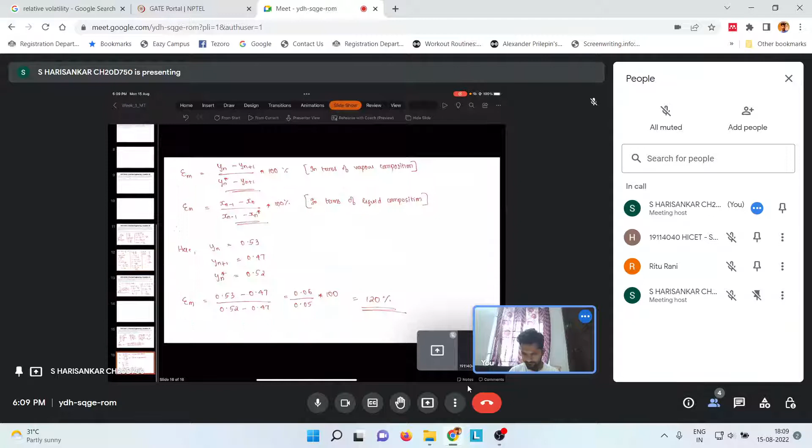Fine. So how do you guys want me to proceed? You want me to give a brief introduction to distillation, like the McCabe-Thiele method and so on, or shall we go straight into the questions since you've learned these concepts in class? Sir, give some introductions. Okay, fine, sounds good. Thank you, sir. Okay, I hope my screen is visible to you guys. Yes, sir. Okay. Fine.

So today we'll be learning about distillation. Distillation by definition is nothing but a separation process, and this separation occurs based on various different properties. Can you name a few properties by which distillation occurs? Just take a guess. Okay. So distillation mainly occurs based on the difference in the boiling points of components in a mixture. Okay, more people have joined. Yeah, so distillation occurs based on the difference in the boiling points of the different components in a mixture.

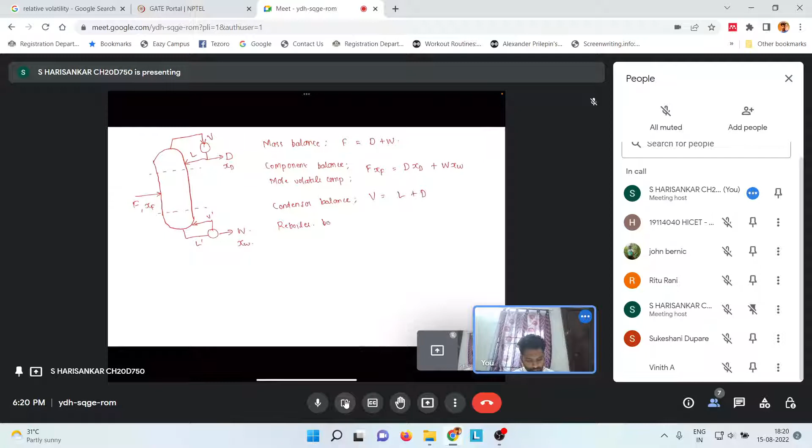So let's say L dash and this is V dash. So the reboiler balance will be L dash is equal to V dash plus W. So these are just simple mass balance equations throughout the distillation column, right? So let's look into a few basic assumptions of the McCabe-Thiele method.

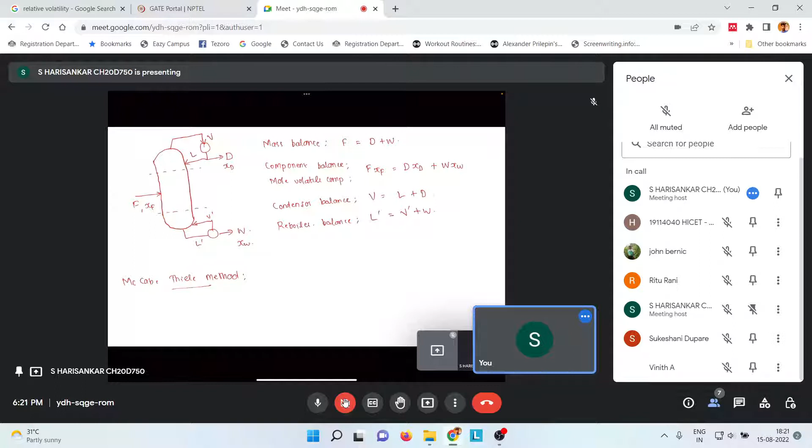So can anyone say what are some of the assumptions associated with the McCabe-Thiele method? Anyone? Okay. So some of the assumptions: there is no heat loss or heat gain occurring in the distillation column. That is, it is basically an adiabatic operation.

Then another assumption is that there is no heat of mixing. And then the most important assumption is constant molar heat of vaporization. What the third assumption essentially means is that, let's say, n moles of liquid is being vaporized. That means n moles of vapor will also be condensed. So these are three of the main assumptions in the McCabe-Thiele method.

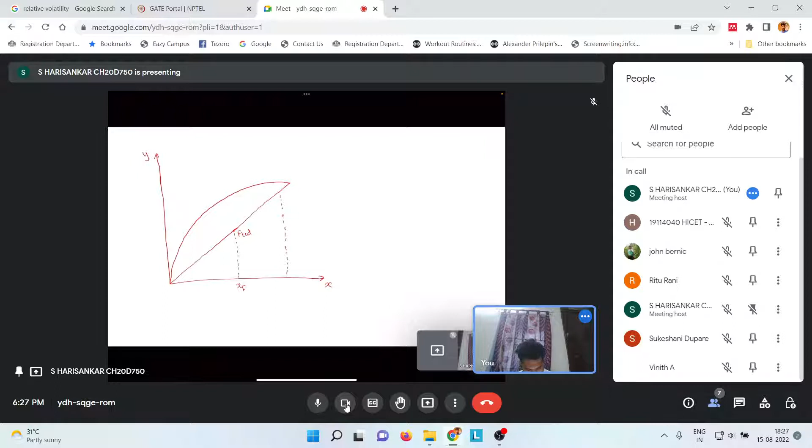Okay, now let's say xf is our feed, and this point xd represents our distillate, and this point xw represents the mole fraction of the more volatile component in the residue. So how you usually do it graphically is that we use this equation, y is equal to R by R plus 1 x plus xd by R plus 1, which is the equation for the rectifying section, and this line is represented by this.

So this line is of the form y is equal to mx plus c basically, where m is the slope and c is the constant, which is the intercept. So this intercept is basically xd by R plus 1, and this slope is basically R by R plus 1.

Now in a similar way, you will also be able to find the operating line for the stripping section using the formula y is equal to L bar by V bar x minus, what was the formula? Yeah, W by V bar into XW. So you can use this to find the stripping section. The operating line will go something like this. And what you usually do is you connect the operating lines of the enriching section and the stripping section with the equilibrium line like this.

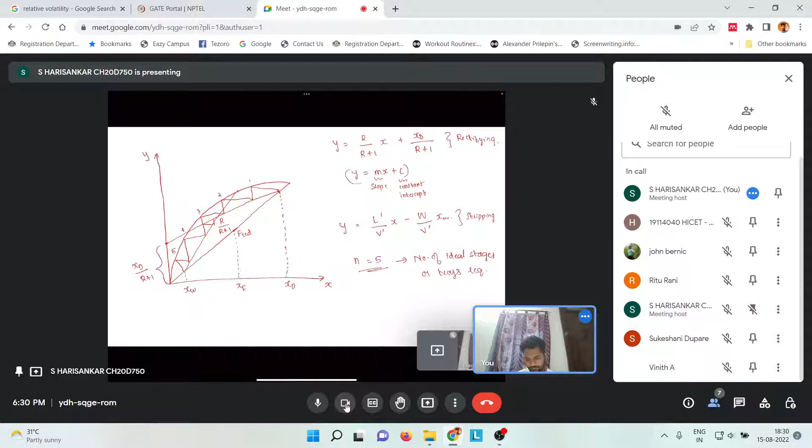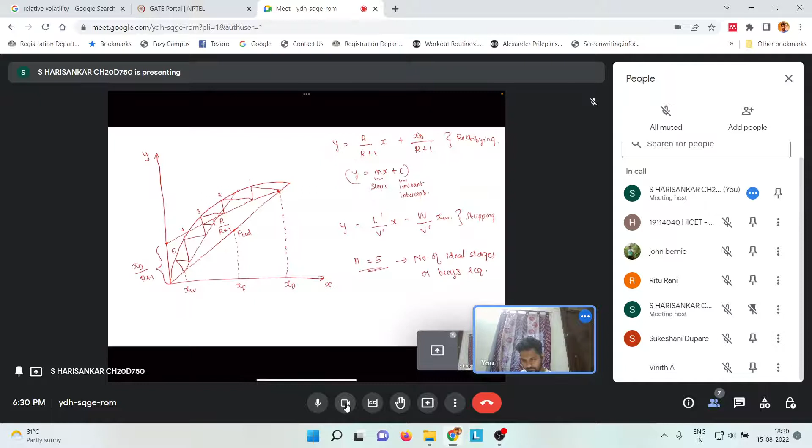So yeah, these are just some of the basic concepts of the McCabe-Thiele method. Now let's, okay. All right.

So there is one more term you need to be familiarized with while proceeding to the numerical problems, which is the feed line or the Q line. Right. So there is one term which is called Q, which is nothing but the fraction of liquid in the feed. So the feed that you put inside the distillation column can be of 5 different types. It could be subcooled liquid, it could be saturated liquid, then it could be a mixture of both liquid and vapor, so liquid vapor mixture.

Then it could be saturated vapor, and it can also be superheated vapor. Fine. So this Q basically tells us how much of your feed is liquid. So when your feed is subcooled liquid, Q will be greater than 1. When your feed is saturated liquid, Q will be 1. When your feed is a liquid vapor mixture, it will be between 0 and 1. When your feed is saturated vapor, Q will be 0. And for superheated vapor, it will be less than 0.

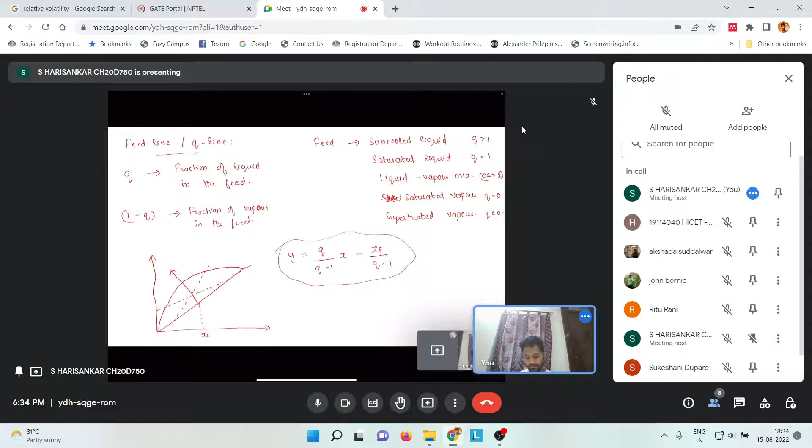Yeah, so these are some of the basics and mainly the basic general equations that you need to remember while solving problems from distillation. So let's get to today's questions for distillation.

Okay, so let's go with the 2018 question.

So before we proceed, are the basic concepts of distillation clear to everyone? Do you have any particular things that you want me to explain, or any doubts from the things that we just looked into? Feel free to interrupt me at any time. I'm more than happy to help. Is this fine, or shall we proceed? Can anyone respond? Okay, I assume things are fine. Fine. So let's get into this question.

So this is a question from 2018 GATE Chemical Engineering. A binary distillation column is designed by the McCabe-Thiele method to get a distillate mole fraction of 0.9. The enriching section operating line has an intercept with the y-axis at 0.3 mole fraction. The ratio of liquid to vapor molar flow in the enriching section is, rounded off to 3 decimal places, blank.

You can refer to the NPTEL lecture series for this concept, lecture 3, week 9, number of trays by McCabe and Thiele for distillation, Mass Transfer Operations 1 by Professor B. Mandal, Department of Chemical Engineering, IIT Guwahati. These videos are available for free on the NPTEL website, and it's suggested that you make use of this opportunity to get the concepts more clear.

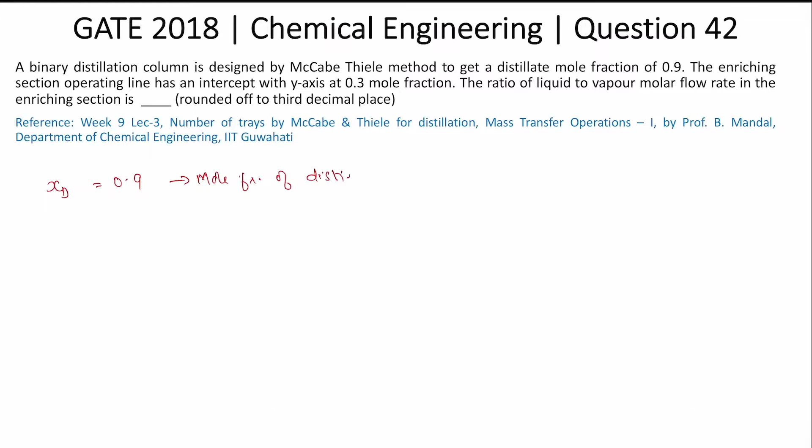So let's just write the data that they have given to us. They have given XD, the mole fraction of the more volatile component in the distillate, as 0.9. They have also given us that the intercept of the enriching operating line with the y-axis is 0.3. We just saw how this enriching operating line intercepts the y-axis and how that is related to the general equation of the enriching section. So that is 0.3.

For an enriching section, the general equation is y = R/(R+1) x + xD/(R+1). So the intercept 0.3 is the intercept from the general equation, so 0.3 = xD/(R+1). And the slope is R/(R+1). The other form of this equation shows that the slope is also equal to L/V. So what we have to find here is L/V, which equals R/(R+1), where R is the reflux ratio.

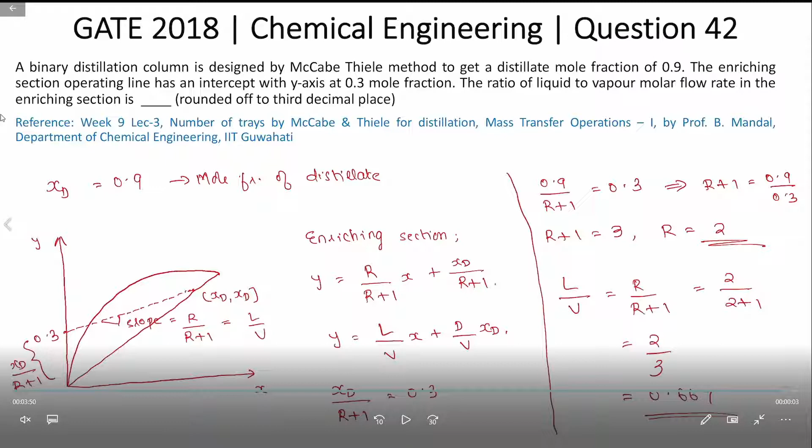So this is a straightforward question that we can solve using the concepts that we learned while doing McCabe-Thiele graphically.

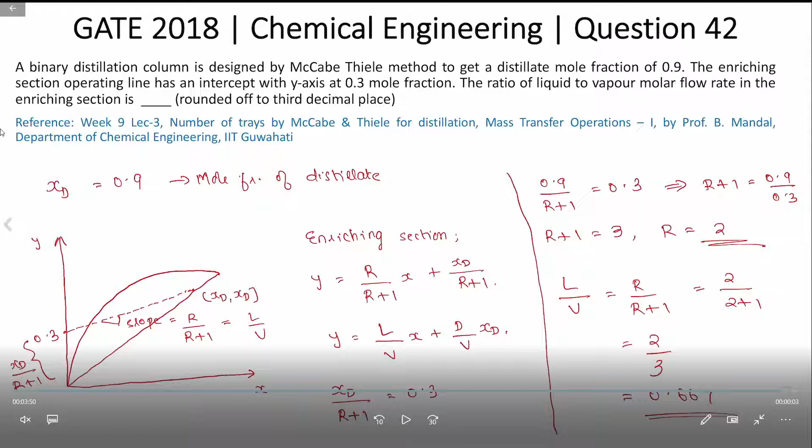Is this clear? Okay, let's move on to other problems. Fine.

So this is a question from 2017 GATE. The composition of vapor entering a tray in a distillation column is 0.47. The average composition of the vapor leaving the tray is 0.52. All the compositions are expressed in mole fractions of the more volatile component. The Murphree efficiency based on the vapor phase, rounded off to the nearest integer, is blank percent.

You can also find the NPTEL lecture series for this on the NPTEL website by Professor B. Mandal from IIT Guwahati. There are a few efficiencies which we can measure, basically the efficiency of the tray or the efficiency of mass transfer that occurs in a distillation column. And one such efficiency is the Murphree efficiency.

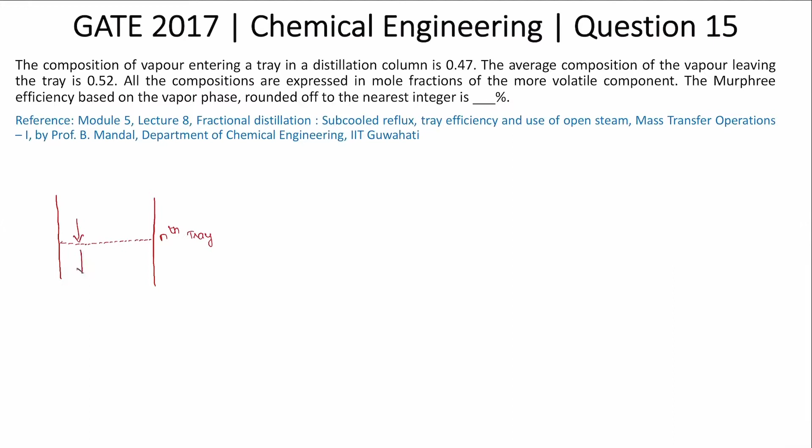So by definition, let's take a tray and let's say it's the nth tray. So there will be liquid and vapor coming in and going out. So let's say Ln-1 is the liquid that is coming from the n-1 tray, and Ln is the liquid that is going out from the nth tray. And you will have vapor also as Vn+1 coming in and Vn going out of the nth tray.

Their corresponding compositions can be represented as Yn for Vn, Yn+1 for Vn+1, Xn and Xn-1 for the liquid. Now this is for a real case. When you do it for an ideal case or the ideal stage, this Yn and this Xn of Vn and Ln will be in equilibrium. So we can represent that as Yn* and Xn*. So in ideal stages, the products leaving the nth tray are in equilibrium. So Xn can be represented as Xn* and Yn can be represented as Yn* in the ideal case.

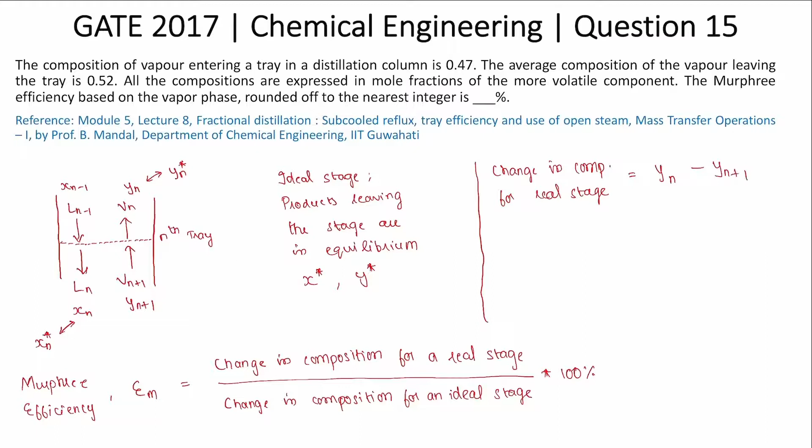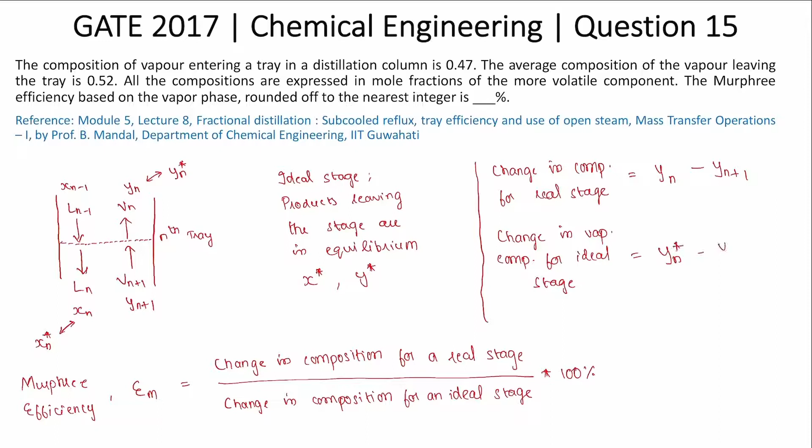So for a real stage, here we want it in terms of vapor composition. So change in vapor composition for a real stage is equal to Yn - Yn+1. And similarly, the change in vapor composition for an ideal stage is equal to Yn* - Yn+1. So the Murphree efficiency in terms of vapor phase composition is the change in composition for the real case by the change in composition for an ideal stage, which is basically (Yn - Yn+1) / (Yn* - Yn+1) into 100%. So this is the Murphree efficiency's general equation in terms of vapor phase composition.

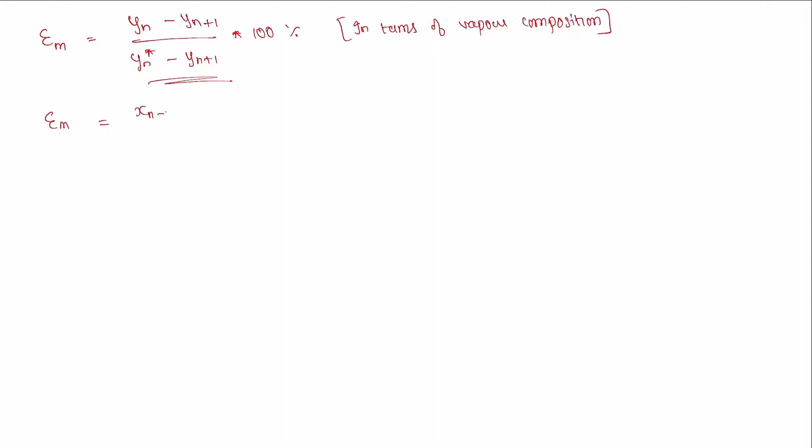Now we can also write this similarly in liquid phase composition as (Xn-1 - Xn) / (Xn-1 - Xn*) into 100%, and this is in terms of the liquid phase composition. So here also the concept is the same. The Murphree efficiency is equal to the change in liquid composition for a real stage by the change in liquid composition for the ideal stage.

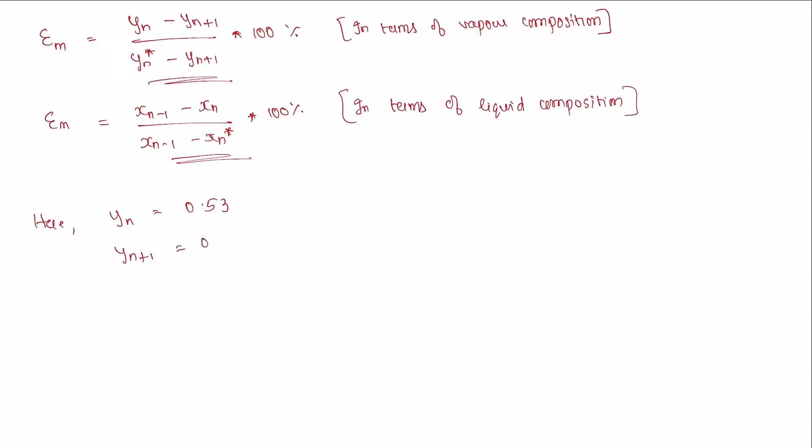So now we have been given a few data here. Yn is given as 0.53, Yn+1 is given as 0.47, and Yn* is given as 0.52. So we just have to substitute these values in the vapor phase equation, and we can find the Murphree efficiency by direct substitution. So Murphree efficiency Em is equal to (0.53 - 0.47) / (0.52 - 0.47), and this will come to 120%. Is this clear?

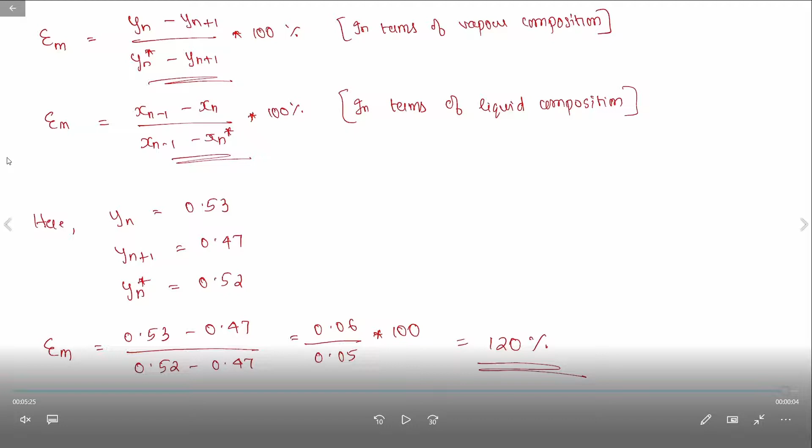Okay. Fine, let's move on.

Okay. So this is again a distillation question which was asked in GATE 2015. A binary feed consisting of 25 mole percent liquid and 75 mole percent vapor is separated in a staged distillation column. The mole fraction of the more volatile component in the distillate product is 0.95. The molar flow rate of the distillate is 50% of the feed flow rate, and the McCabe-Thiele method can be used to analyze the column. The Q line intersects the operating line of the enriching section at (0.35, 0.5) on the XY diagram. The slope of the stripping section operating line up to 1 decimal place is blank. So we have to find the slope of the stripping section, which is basically L bar by V bar. So let's see how to proceed with this question.

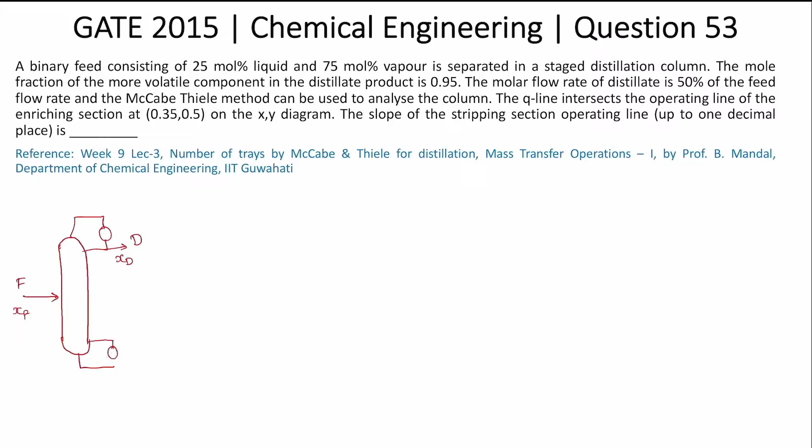So let's draw our distillation column. We have the feed F with the composition XF, the distillate D with its composition XD, and the residue W with its composition XW. It is given that the feed is 25% liquid, which means Q is equal to 0.25, and the mole fraction of the distillate is given as 0.95, and the molar flow rate of the feed is twice that of the distillate. So F is equal to 2D. They have also given us that the operating line of the enriching section intersects the Q line at 0.35 and 0.5. That means at the feed tray, X is equal to 0.35 and Y is equal to 0.5.

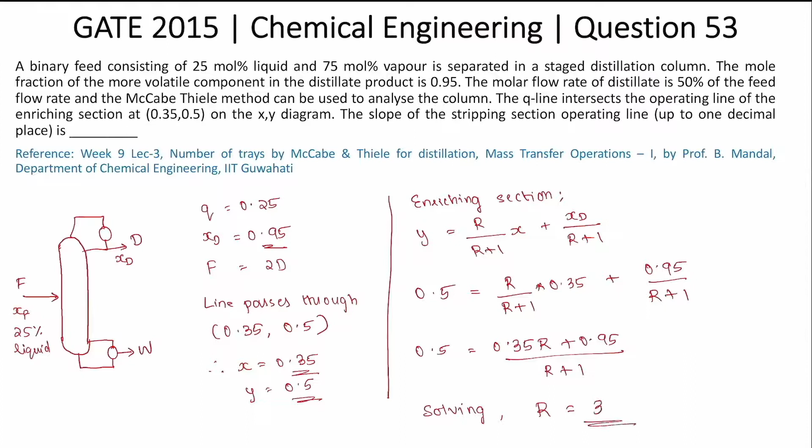So let's write the general equation for the enriching section: Y = R/(R+1) X + XD/(R+1). We have the value for XD, and the values for X and Y from the intersection. We just have to substitute to find R. So 0.5 = R/(R+1) × 0.35 + 0.95/(R+1). This is just direct substitution and solving this equation, and we find that R is equal to 3. So R, which is the reflux ratio, is equal to L/D, and we have L/D equal to 3.

So just rearranging it, we can write it as L is equal to 3D. Now let's take a condenser balance. So we have the distillate D, the liquid that is going back inside as L, and V is the vapor, and the condenser balance is V is equal to L plus D. Here we already have L is equal to 3D. So we just have to substitute: V is equal to L plus D. Substitute for L as 3D, and we get V is equal to 3D plus D, which is 4D.

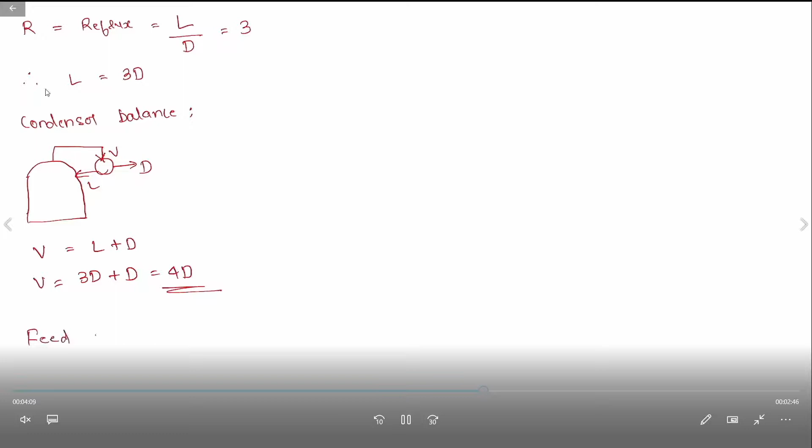Yeah. So feed is 25% liquid. That means 75% vapor. So we have Q is equal to 0.25.

So let's take a feed tray balance. We have the feed incoming, which is F, the liquid incoming and outgoing as L and L bar, and V and V bar as the vapor that is coming in and going out. So from these equations, we can write an equation using L bar, L and Q as L bar is equal to L plus QF, and V bar is equal to V minus (1 minus Q) into F. So this equation is this L bar equation.

Just a second, sorry for the interruption. I lost my... Okay. Okay. Sorry for that. Okay.

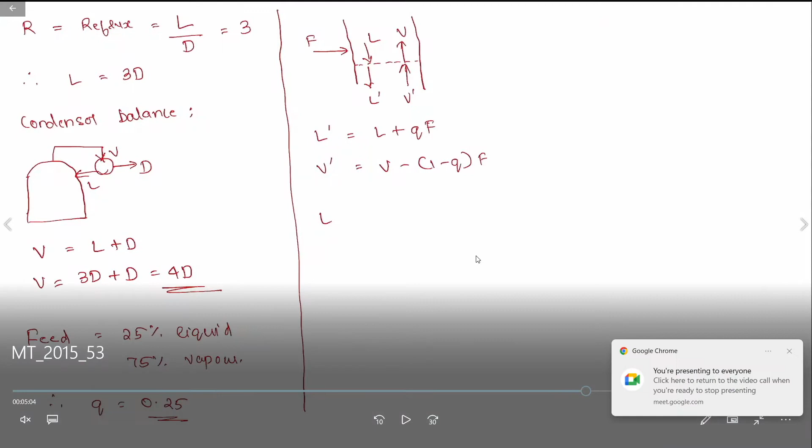So L bar is equal to L plus QF. What this means is L bar, which is the liquid that is going out of the feed tray, is equal to L, which is the liquid that is coming into the feed tray, plus Q into F, which is the fraction of liquid that is available in the feed tray. And similarly, we can write a balance for V bar as well. So V bar, which is the vapor that is entering the feed tray, is equal to V, which is the vapor that is exiting the feed tray, minus 1 minus the fraction of vapor that is available in the feed.

Okay. Fine. So just substitute the values. We have L is equal to 3D, and we also have the value for F, which is 2D. So just write this equation L bar in terms of D. So L bar will be 3D plus 0.25 into F, and F is 2D. So L bar is equal to 3D plus 0.25 into 2D, and we'll get L bar is equal to 3.5D.

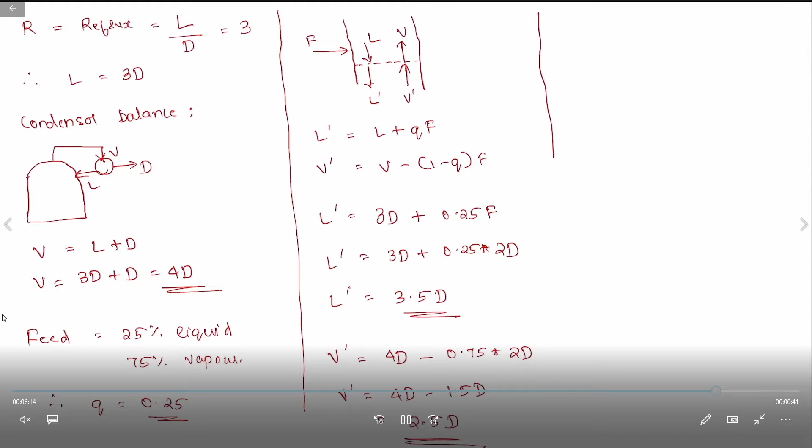Similarly, we can also write V is equal to 4D from the condenser balance. So we can get an equation for V bar as well in terms of D as 2.5D. Now slope of the stripping section is equal to L bar by V bar. So this is what we need to find here, L bar by V bar, and this will be equal to 3.5D by 2.5D, and we can cancel out these terms and we'll get the final answer as 3.5 by 2.5, which is 1.4.

So this is the ratio of the molar flow rate of the liquid to the vapor phase in the stripping section, which is equal to the slope of the stripping section. So these are some of the questions asked in previous GATE years, and you can see most of these questions rely on mass balance of the distillation column, the condenser and the reboiler as well, and depend on the general equation of these operating lines. So these are some of the concepts you need to learn for preparing for GATE, especially in mass transfer and distillation. Any doubts on how we proceeded with this, how we got the answer?

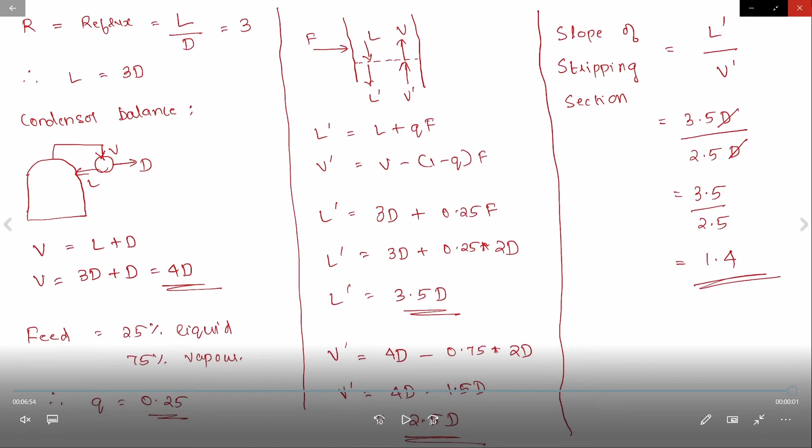Okay, fine. That's about it for today. Just to summarize what we did today, we looked at a few of the concepts with regards to distillation and relative volatility. We looked at how we can graphically represent the McCabe-Thiele method, the operating lines for the enriching and the stripping section in graphical form, and how to find the number of trays graphically. And we also looked at three questions from previous year GATE, which relied mainly on the general equations for these operating lines.